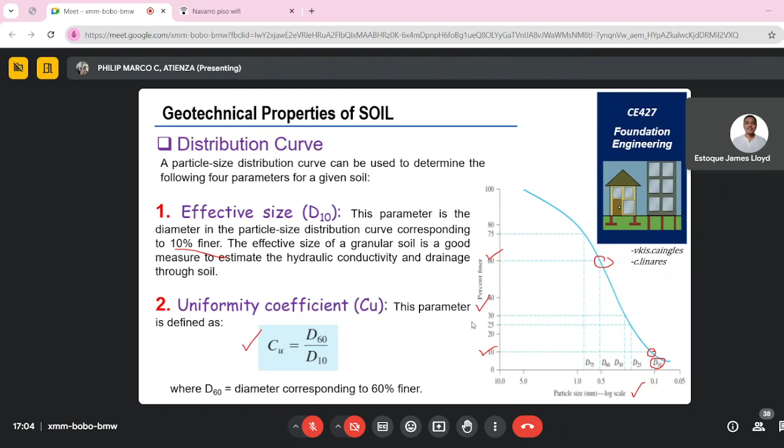You see it? Yes, sir, I see it. Okay, so let's proceed.

So our next topic is about subsurface exploration. At the end of this lesson, students should be able to identify the different methods of subsurface exploration techniques used in construction, and also identify the different exploratory borings used in the field of construction.

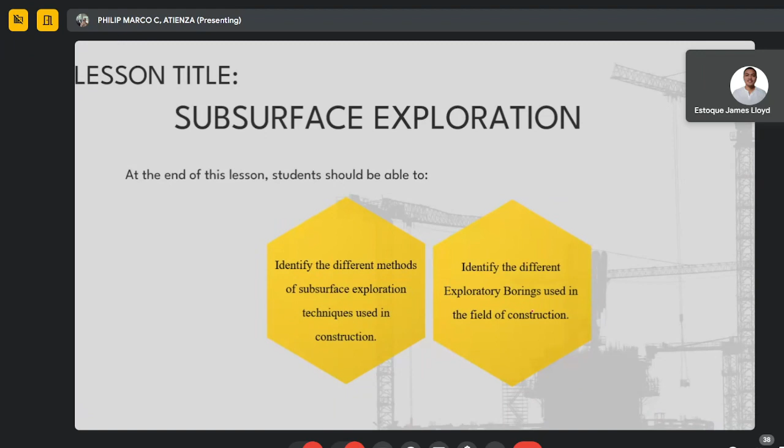So subsurface exploration, according to Braja Das, is the process of identifying the layers of deposits that underlie a proposed structure and their physical characteristics, generally referred to as subsurface exploration.

Another one is Murthy, 2007: the field and laboratory investigations required to obtain the essential information on the subsoil is called soil exploration or soil investigation. And the last one, Araro, 2004.

Subsurface exploration is done for obtaining information about subsurface conditions at the site of proposed construction. It is essential for the design of structures and for planning construction techniques.

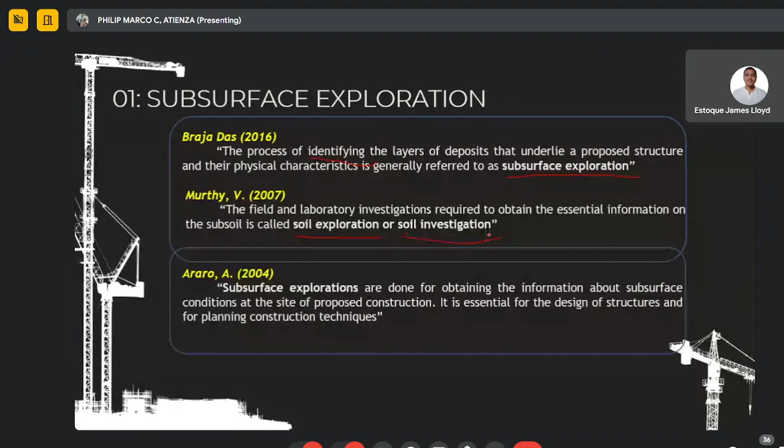So what do we need to conduct subsurface exploration? The success or failure of a foundation depends essentially on the reliability of the various soil parameters obtained from the field investigation and laboratory testing, and used as an input into the design of foundation. Sophisticated theories alone will not give a safe and sound design. This is according to Murthy, 2007.

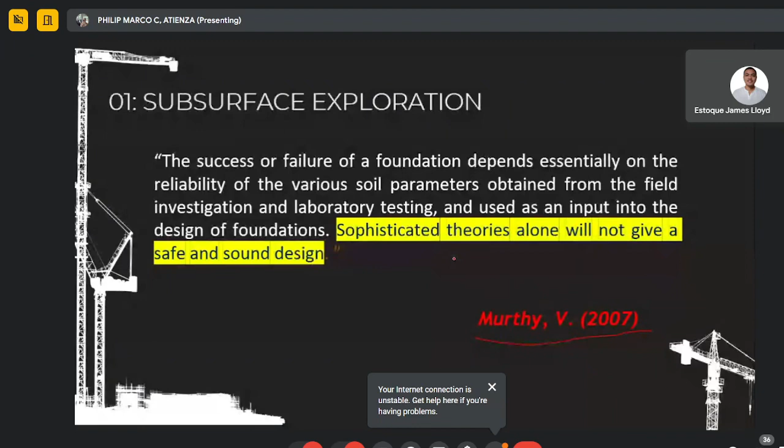So the subsurface exploration broadly involves the following. First is planning of a program for soil exploration.

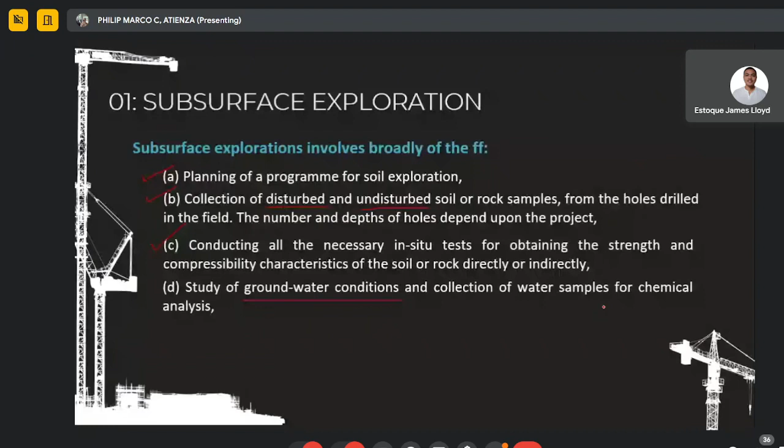Next is the geophysical exploration, if required. Next, conducting all the necessary tests on the samples of soil and water collected.

Next is the preparation of drawings and charts, then analysis of the data collected, and then preparing our report. So all of this is for subsurface exploration.

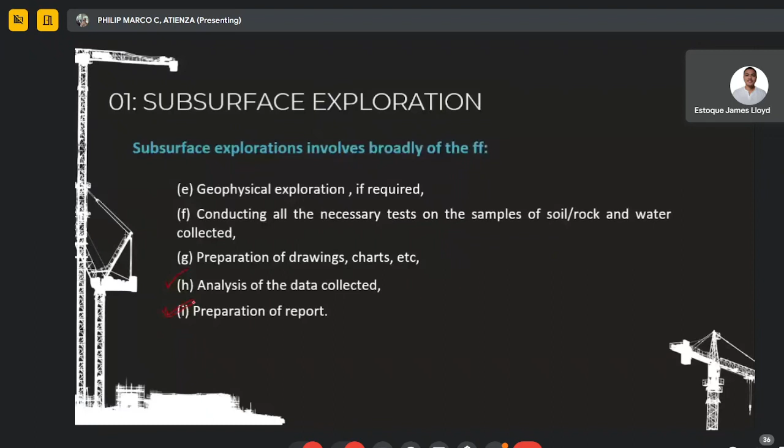So site investigations are generally done to obtain information that is useful for one or more of the following processes. First is to select the type and depth of foundation for a given structure.

Next, to determine the bearing capacity of soil, which is very important in designing a foundation. Third, to estimate the probable maximum and differential settlements.

Fourth is to establish the groundwater level and to determine the properties of water. Fifth, to predict the lateral earth pressure against retaining wall and abutments. Next is to select suitable construction techniques. Next, to predict and solve potential foundation problems. Next is to ascertain the suitability of the soil as a construction material. And lastly is to investigate the safety of existing structures and to suggest remedial measures.

So those are the different purposes for our site investigation. So we don't just focus on the structure we will build, but we also have to consider the existing structures near the proposed structure, because it's possible that they could be disturbed, especially the foundation.

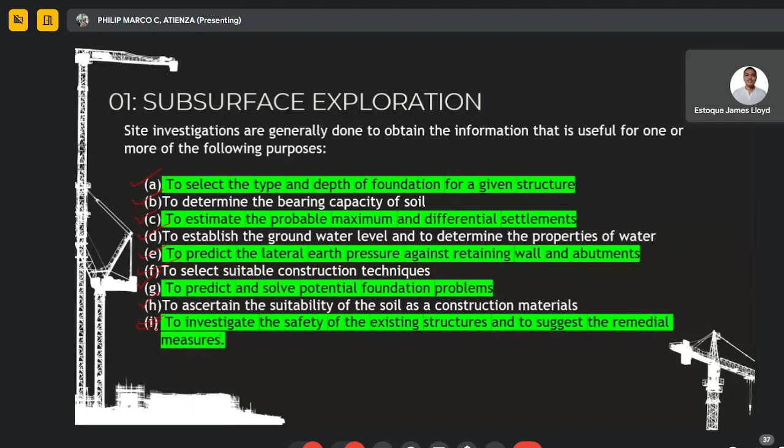So, the planning of a subsurface exploration program. A subsurface exploration program depends, first, on the type of structure to be built. Second, the variability of the strata at the proposed site. And the cost of the investigation and the entire project.

So it would therefore be more desirable to invest some amount on subsurface exploration than to over-design the building and make it costlier. Using this subsurface exploration, we can design an economic foundation instead of over-designing our building. With the given or collected data, that becomes our basis in designing our foundation up to the roof.

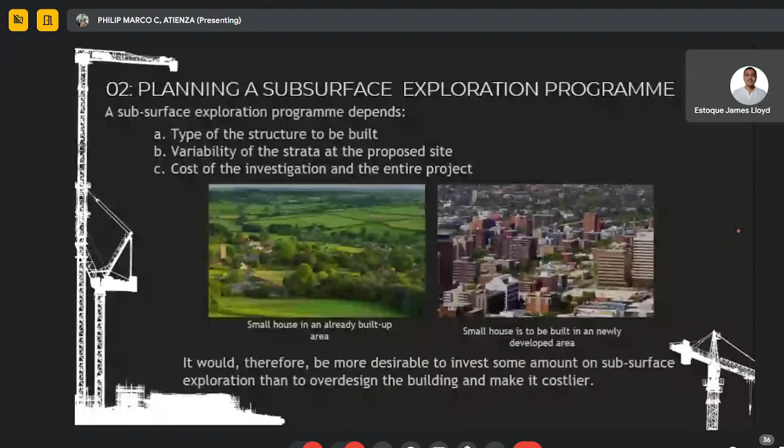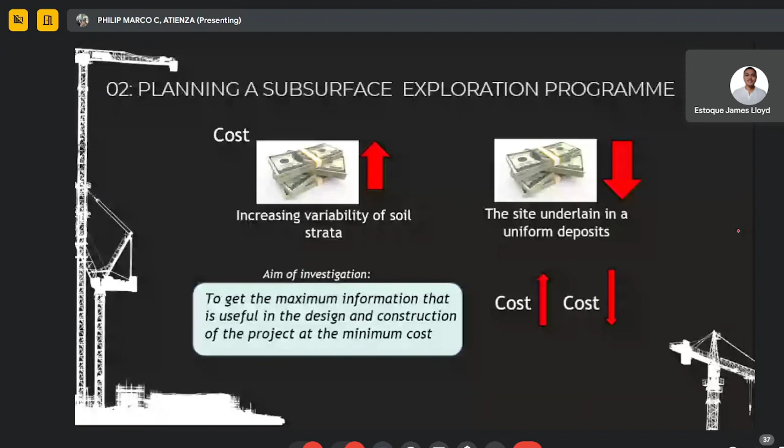So with increasing variability of soil strata, the site being underlain uniformly, we aim to get the maximum information that is useful in the design and construction of the project at the minimum cost.

Next is the stages in subsurface exploration. The first is the site reconnaissance. It includes a visit to the site and studying maps and other relevant records. So it's more on ocular inspection and gathering of data.

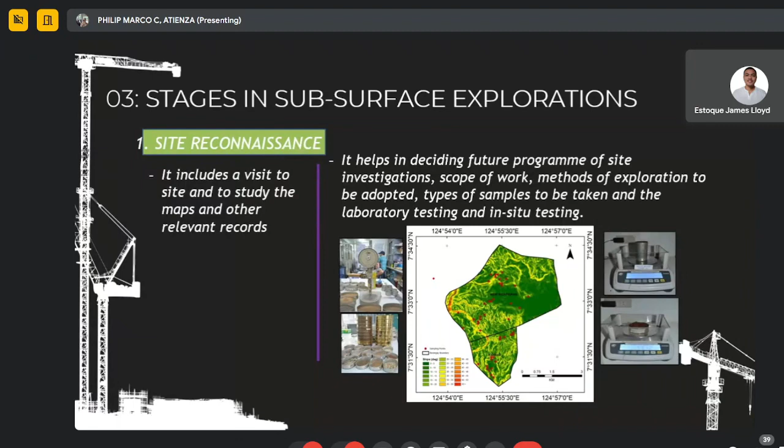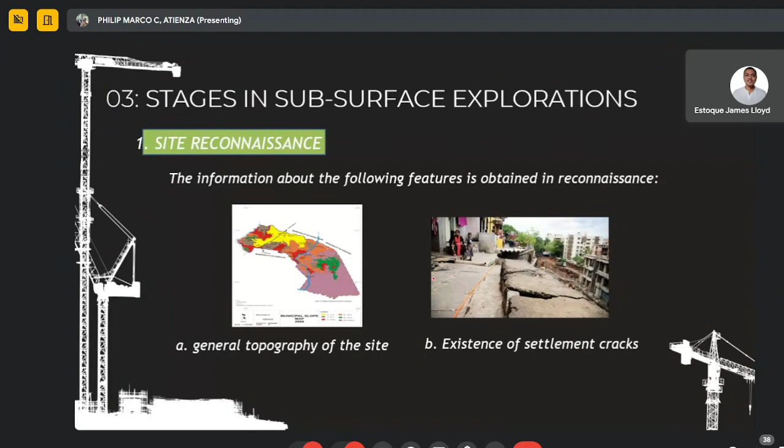Site reconnaissance. So the information about the following features is obtained in reconnaissance. First is the general topography of the site. Next is the existence of settlement cracks. Third, the evidence of landslide, creep of slopes, and shrinkage cracks.

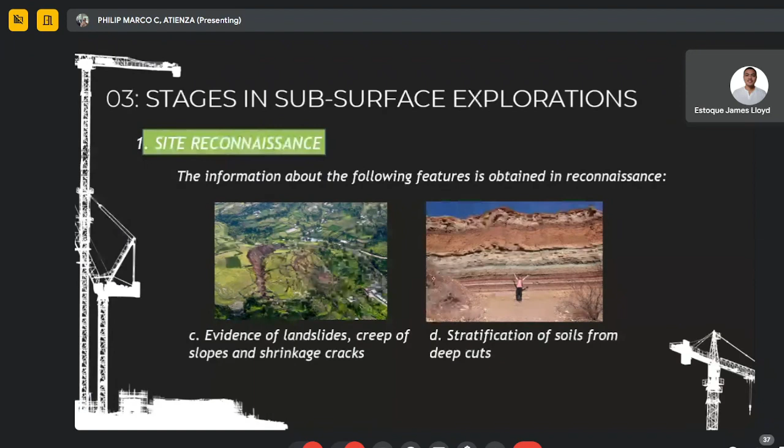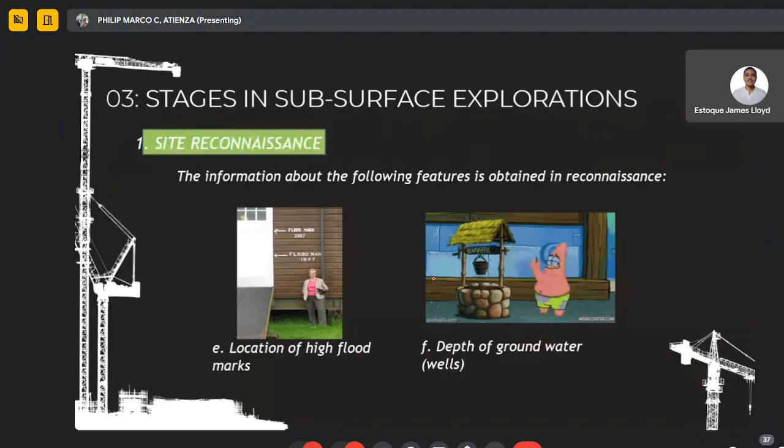The fourth is the stratification of soil from deep cuts, location of high flood marks, depth of groundwater, existence of springs or swamps, and then drainage pattern.

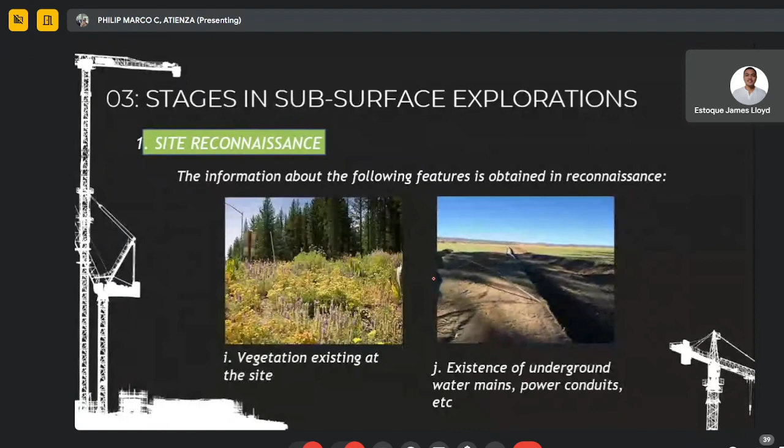So also, we have to consider the vegetation at the existing site, and the existence of underground water mains or power conduits. This is used in the US context. So those are the different pieces of information in the site reconnaissance.

The next step is the preliminary exploration. The aim of this is to determine the depth, thickness, extent, and composition of each soil stratum at the site. It is in the form of few borings or test pits, where you conduct field tests or borings to penetrate or get a sample of our soil.

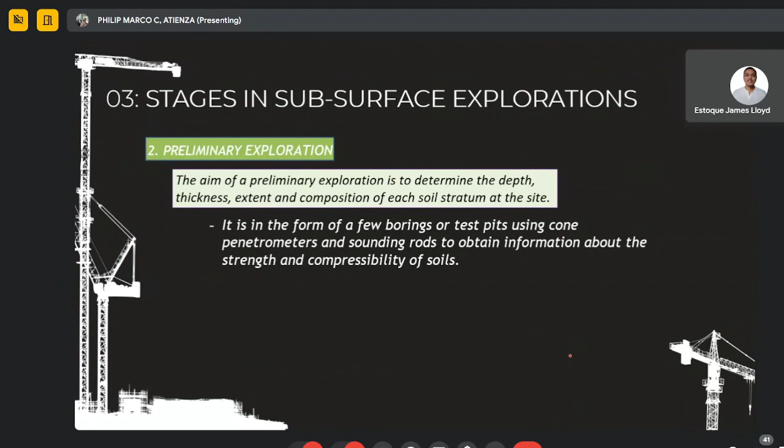And then there's also detailed exploration, to determine the engineering properties of the soil in different strata. It includes an extensive boring program, sampling and testing of samples in a laboratory. Examples of field tests are the vane shear test, plate load test, and permeability test, which are conducted to determine the properties of our soil in its natural state.

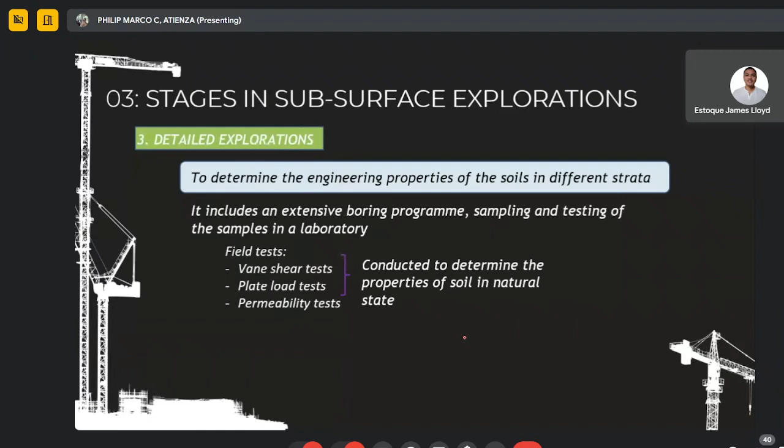So it should be an undisturbed soil sample. For complex projects, this is used especially when our project involves bridges, dams, and multi-story buildings, and less so for small projects like houses.

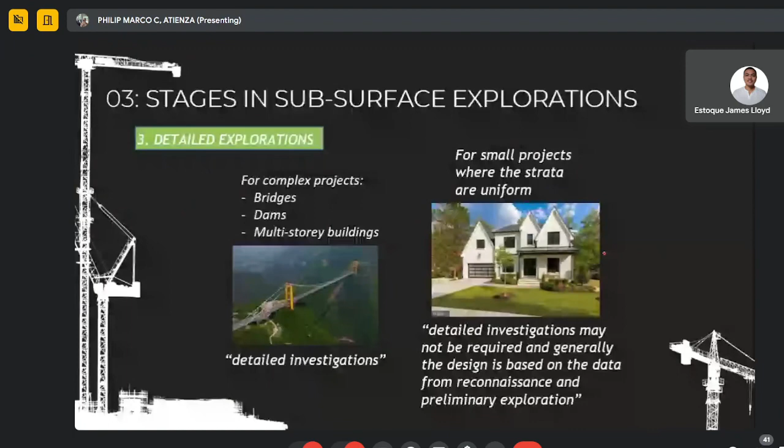Next is the sampling of soil. Soils met in nature are heterogeneous in character, with a mixture of sand, silt, and clay in different proportions. At the top, we have soil with particle size more than 0.075 mm, and then soil with particle size finer than 0.075 mm, with examples for each.

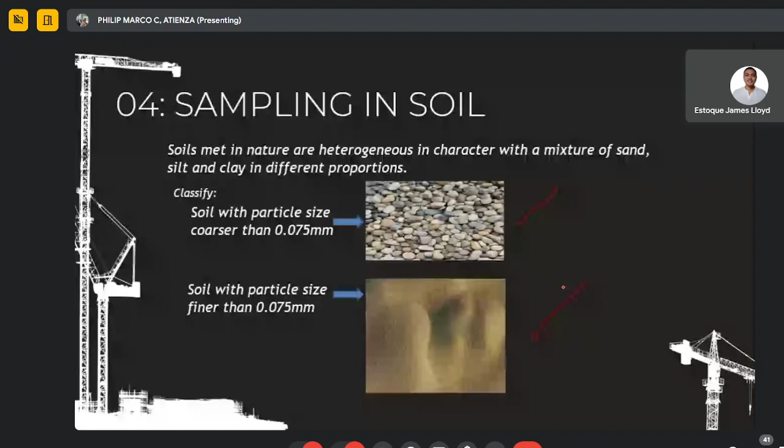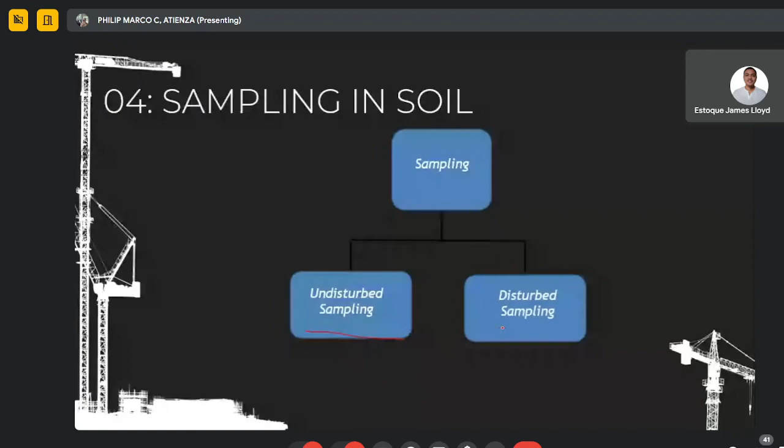So again, we have what are called undisturbed sampling and disturbed sampling. For disturbed samples, these are representative samples which contain all the constituents in their proper proportions, but the structure of the soil is disturbed. The various laboratory tests used for these include mechanical properties, atterberg limits, specific gravity, and chemical analysis.

We have the mechanical properties, atterberg limits, specific gravity, and chemical analysis. For undisturbed samples, these represent the in-situ condition of the soil. So whatever your sample shows reflects the actual condition of the soil, such as the structural arrangement of the particles, water content, density, and stress conditions.

So this is important. The various laboratory tests that can be conducted on such undisturbed soil samples are shear strength, consolidation, in-situ density and water content, and lastly, permeability.

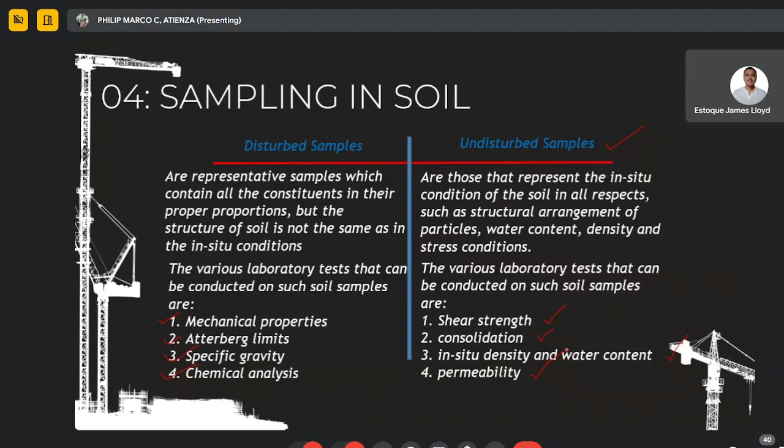The amount of sampling depends on time constraint, topography, cost factors, and the reason why we sample.

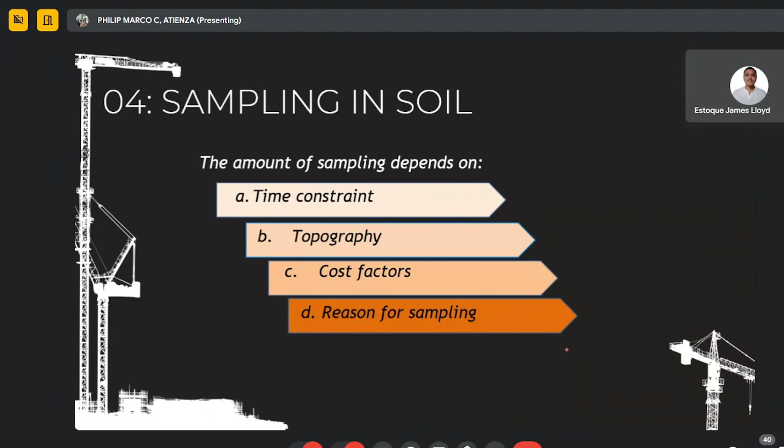How to collect a disturbed soil sample? Basic geotechnical investigation includes using a backhoe to create test pits where you collect soil from the pocket, or using hand augers to collect a sample from a vertical boring. Basically, you just get a soil sample by digging. The fact that it's disturbed, that its natural structure has been altered, makes it a disturbed soil sample.

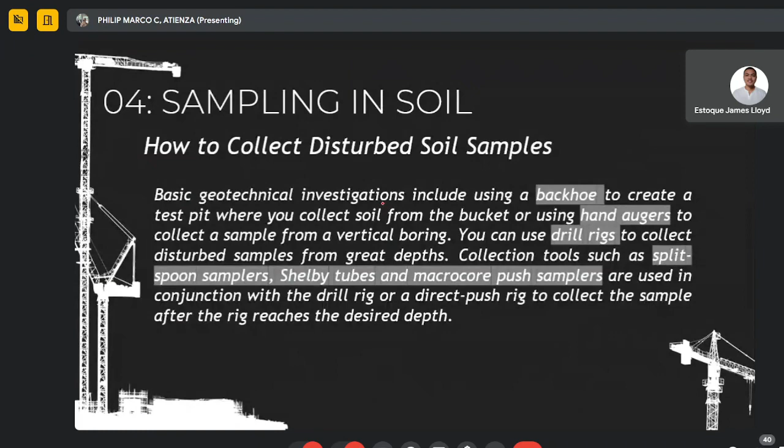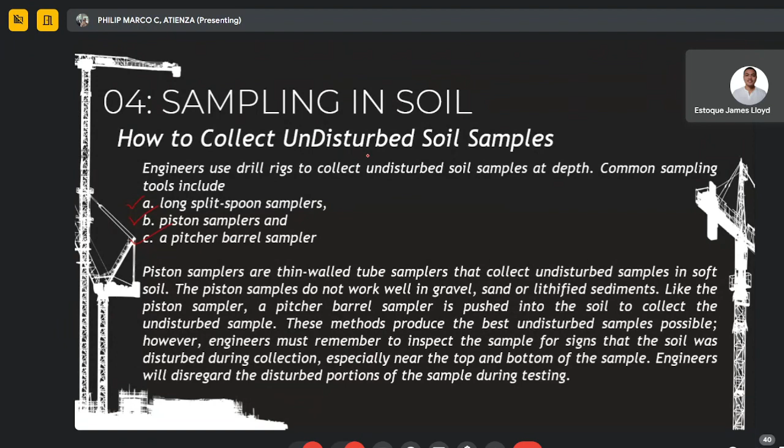For undisturbed soil samples, it's very critical. Engineers use drill rigs to collect undisturbed soil samples at a specific depth. Common sampling tools include the long split spoon samplers, piston samplers, and the pitcher barrel sampler. These are the different sampling tools used to obtain undisturbed soil samples, for example.

Next is exploratory borings in the field. These are the different tools used to get a soil sample. Let's call this hand-operated augers. It is taken at a depth of 10 meters, suitable for all types of soil above the water table, but suitable only in clayey soil below the water table. A string of drill rods is used for advancing the boring. The diameter of the holes normally varies from 10 to 20 centimeters. It is not suitable for hard soils.

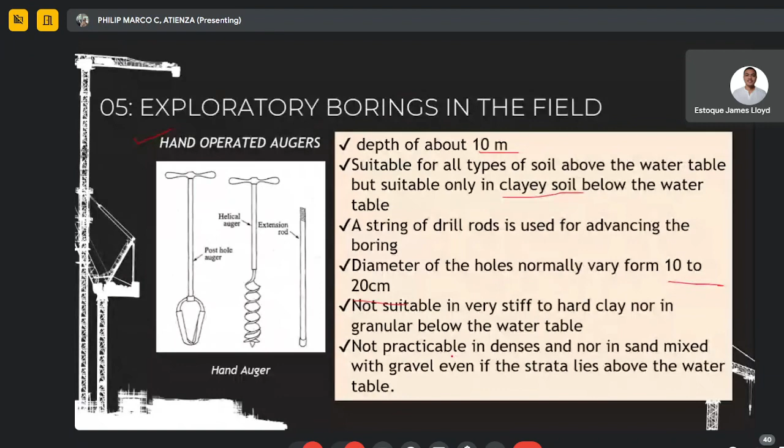Next is what we call power-driven augers. Used in all types of soil, including sandy soils below the water table, but not suitable for soil with mixed gravel or cobbles.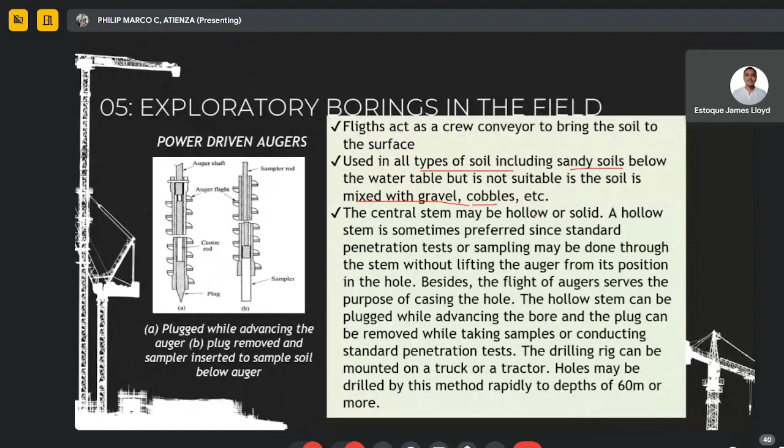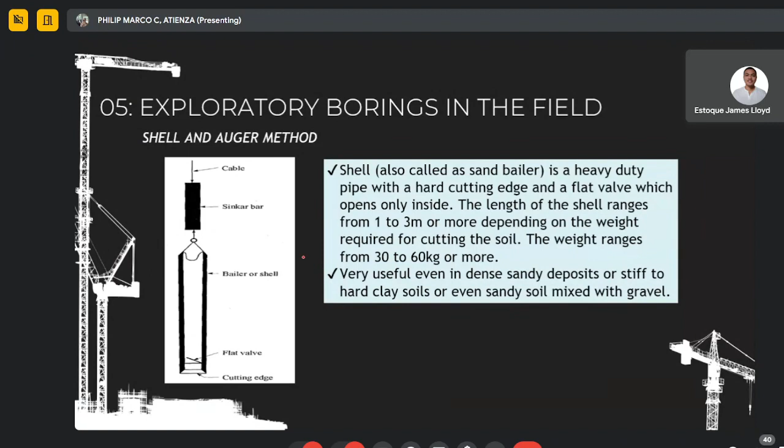Next is the shell and auger method. It is a heavy-duty pipe with a hard cutting edge and a flat valve which opens only inside. These are the different boring methods.

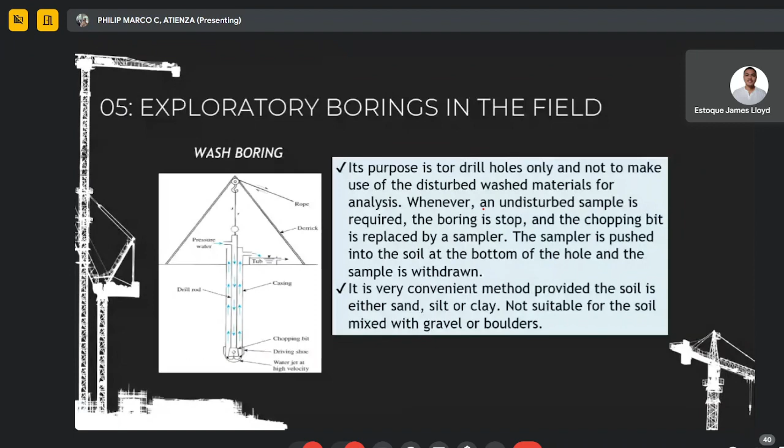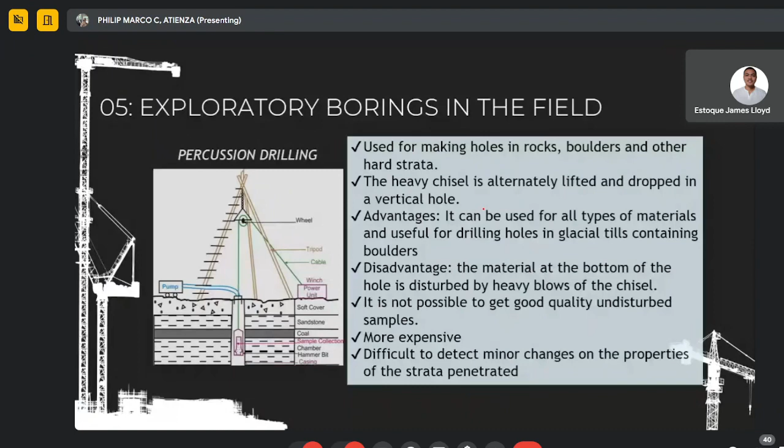Also, rotary drilling and percussion drilling.

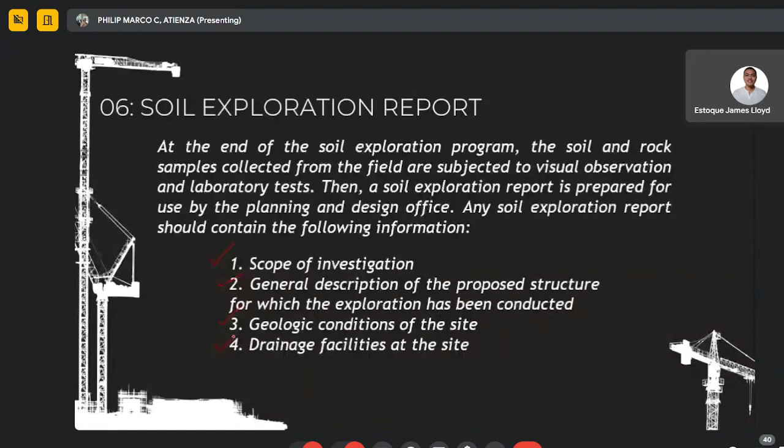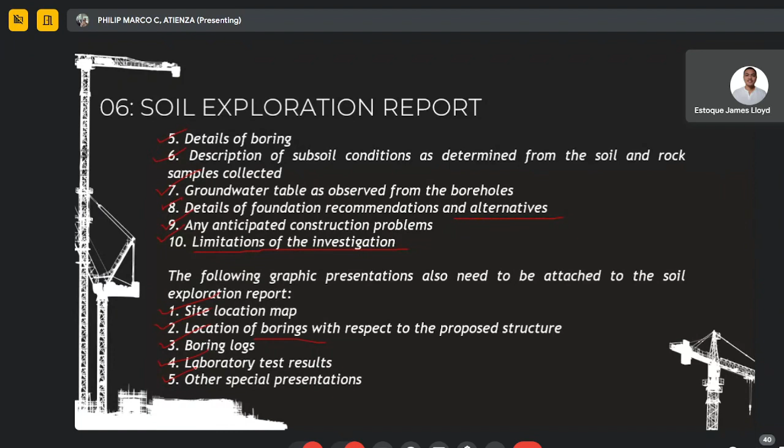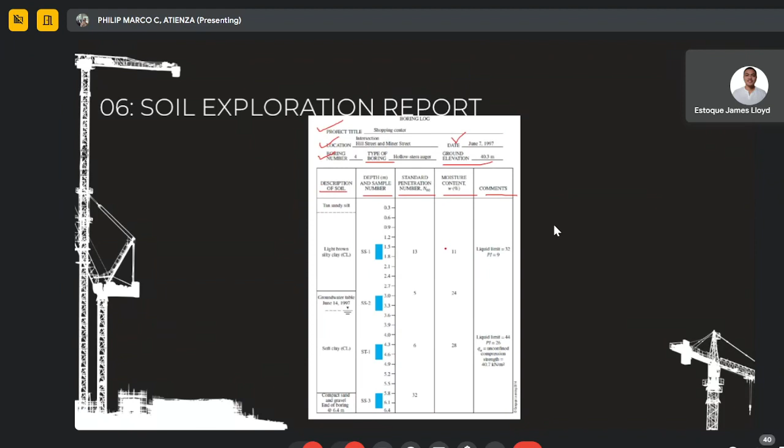So, any questions, class? Any questions?